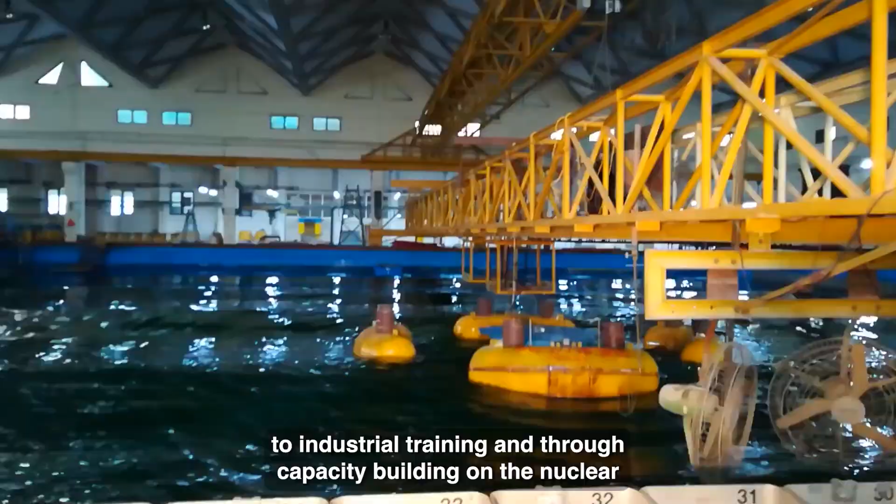This maritime engineering program is a very special multidisciplinary program with input from mechanical, civil, structural, aerospace, naval architecture, chemical, electrical, electronics, and applied mechanics. It is completely dedicated to industrial training and thorough capacity building in the new trade of the maritime sector. It's a growing economy offering many job opportunities and research frontiers as India grows, and the Blue Corridor initiative planned by the Government of India requires maritime engineering growth in the country. This program caters to that expected capacity building.

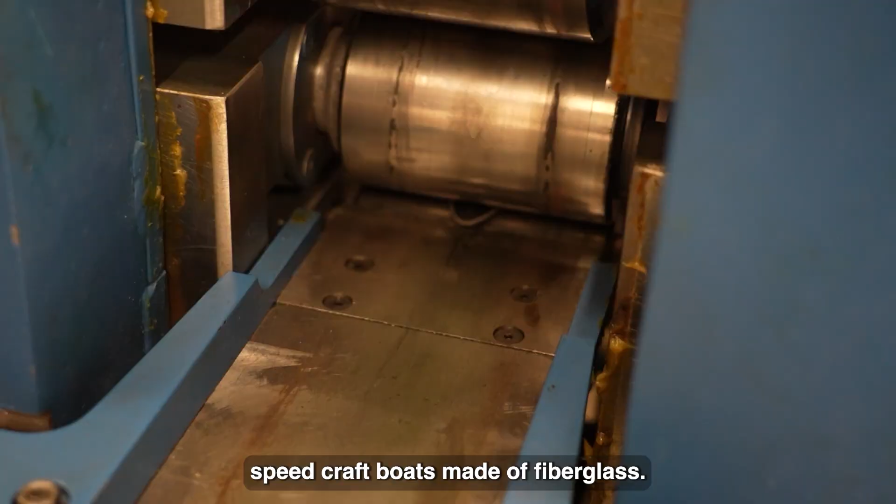This is part of the material science engineering laboratory, a teaching aid for the maritime engineering program. In materials innovation for the maritime industry, though concrete and steel remain conventional choices, we now see titanium vessels and high-speed craft boats made of fiberglass. These advanced materials don't always fit conventional standard design codes. We conduct box furnace tests, tube furnace tests, vacuum arc melting, induction melting, vacuum induction melting, and vacuum sealing, all present in this laboratory, which is just a small segment of the material science laboratory.

A typical furnace can test specimens at operating temperatures as high as 1200 degrees Celsius. At room temperature and ambient conditions, mechanical properties don't change much, but as you'll see in the course lectures, the strength of the material degrades when the temperature rises beyond 600 degrees. So for fire resistant design, you must choose an alloying element such that the strength doesn't degrade beyond 600 degrees Celsius.

Welcome to the ambience of the IIT Madras lecture theatre, one of the interesting classrooms where maritime engineering classes are conducted. We have state-of-the-art projection facilities and good audio-visual recording systems. Once the lecture is over, the system can generate PDF files directly and email them to your email ID. It's a state-of-the-art facility where lectures are recorded for a lifetime and shared with students immediately. This is the IIT Madras library.

The library has collections of standard textbooks and references for the course and program. It also has many online editions of design codes of practice, reference materials, and e-collections of video lectures from international courses and programs related to maritime engineering.

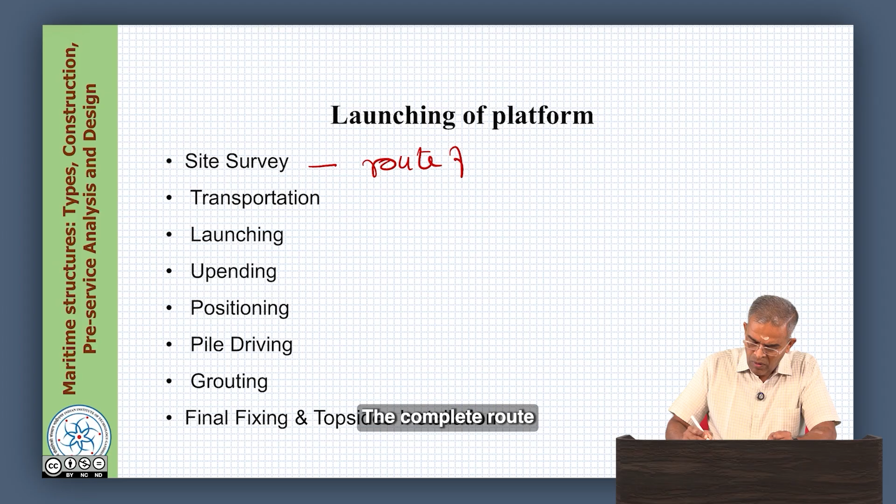Before we launch a maritime structure like an offshore platform, there are a few steps involved to check and assess the requirements for successful launching. One important step is the site survey, where we need to assess the complete route of transportation, the sea conditions, the weather window, and of course the soil conditions at the site.

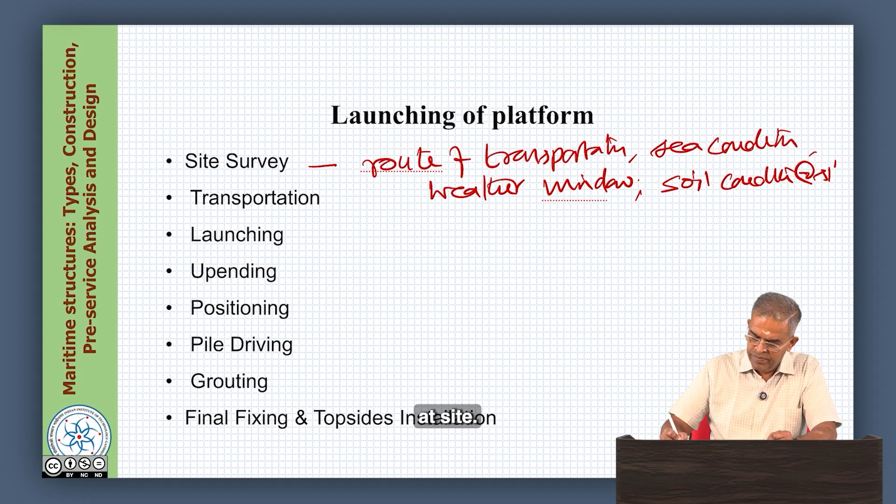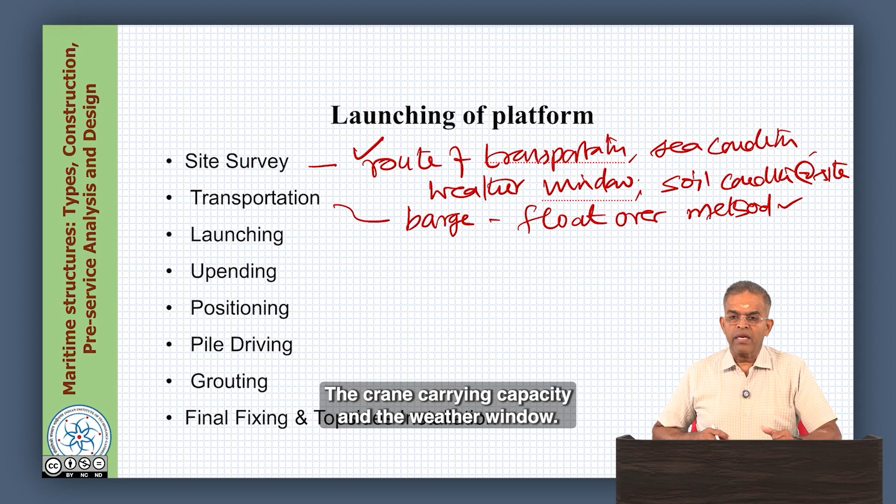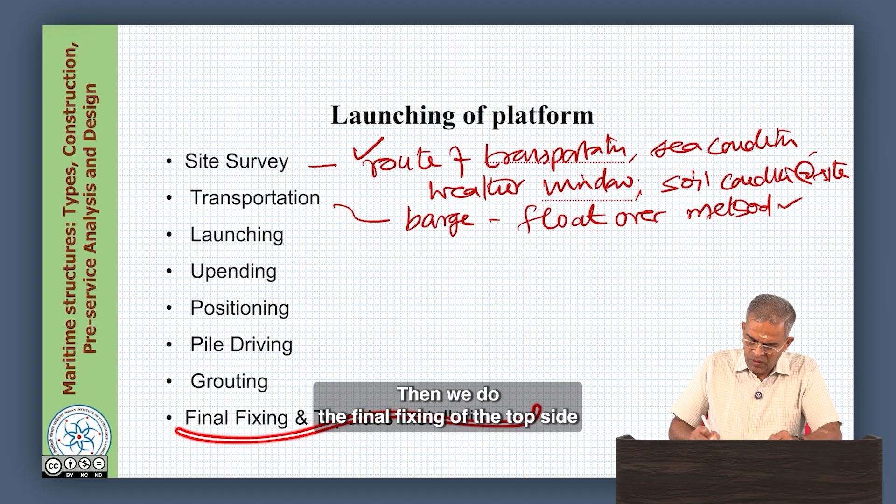We have to ensure that they are all suitably assessed in the design stage itself before we start the launching. Then we need to assess the possibilities of successful transportation, generally done using a barge, which is the float over method. We check the barge capacity, the crane carrying capacity and the weather window, and confirm that transportation through barge float over is possible. Then we start looking at the launching operation, then upending, positioning, pile driving, grouting are all followed after launching. Then we do the final fixing of the top side and make the complete platform ready.

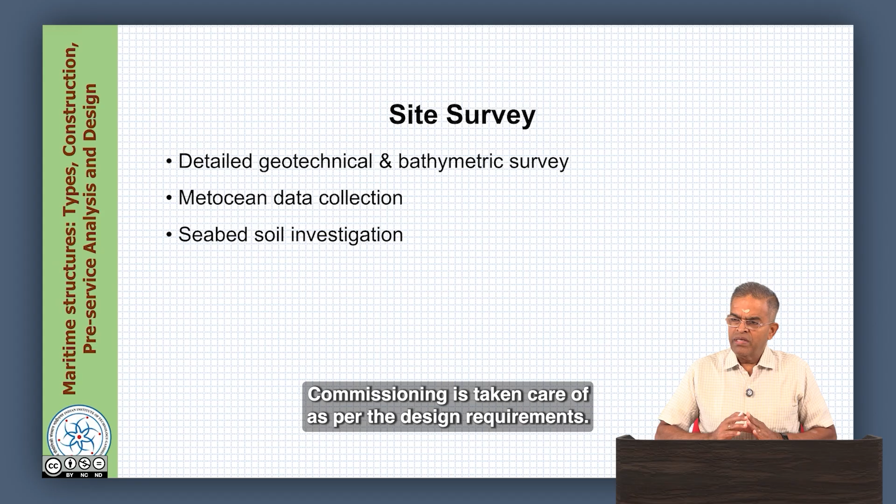Let us talk about some important points related to site surveying. The site surveying job includes detailed geotechnical investigation and a thorough bathymetric survey, which confirms the location chosen for the platform commissioning is taken care of as per design requirements. The geotechnical conditions prevailing at the site can accommodate the design of the piles, and en route of transportation also confirms enough water depth, and the weather or wave climate is suitable for transporting the object from the fabrication yard to the site. So a detailed geotechnical and bathymetric survey report should be ready upfront as part of the site survey.

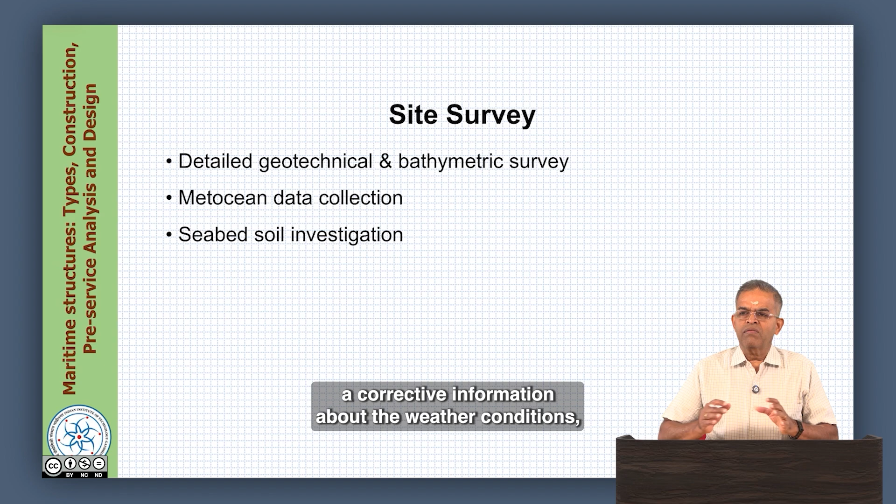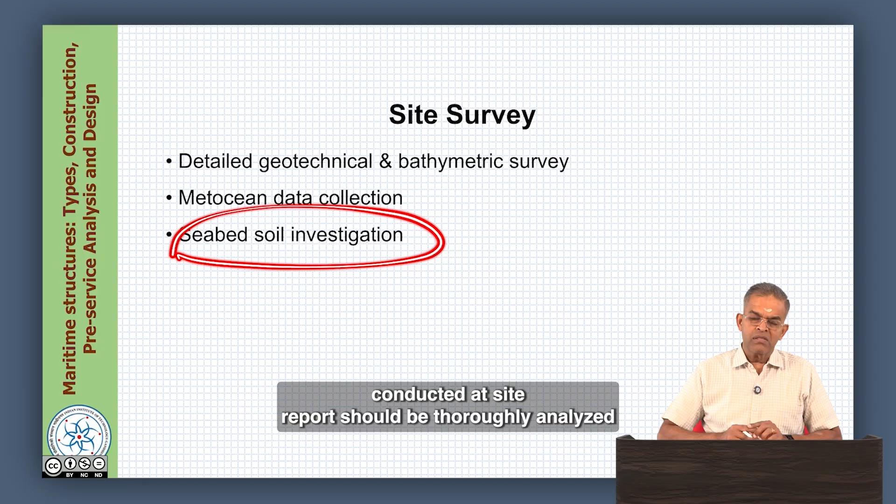Metocean data is also important because it gives cohesive information about the weather conditions, wind condition, current prevalence, wave and wind directions, humidity, temperature, rainfall and sea swelling, etc., during the specific window in which transportation is going to happen. The seabed soil investigation report conducted at site should be thoroughly analyzed so that pile driving can be done feasibly within the required time. Site survey becomes the most fundamental part of this whole process of fabrication, installation and commissioning, so we need to do this carefully and the reports need to be filed with updated information available at the site.

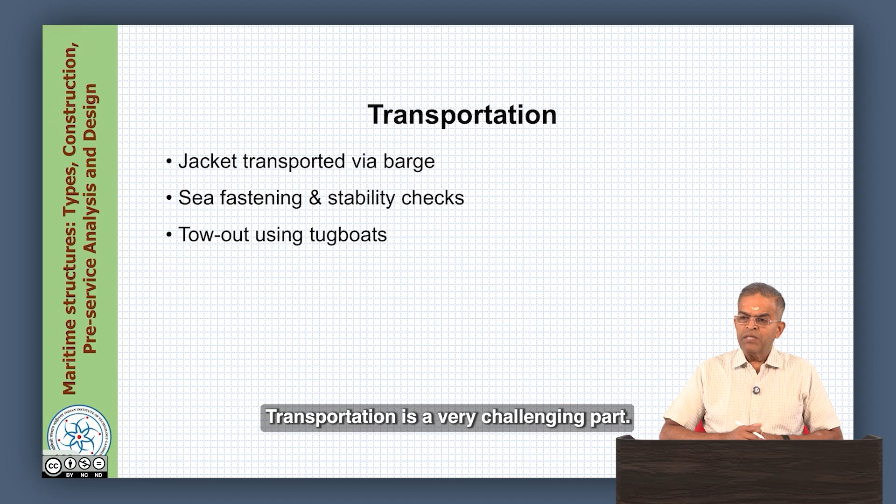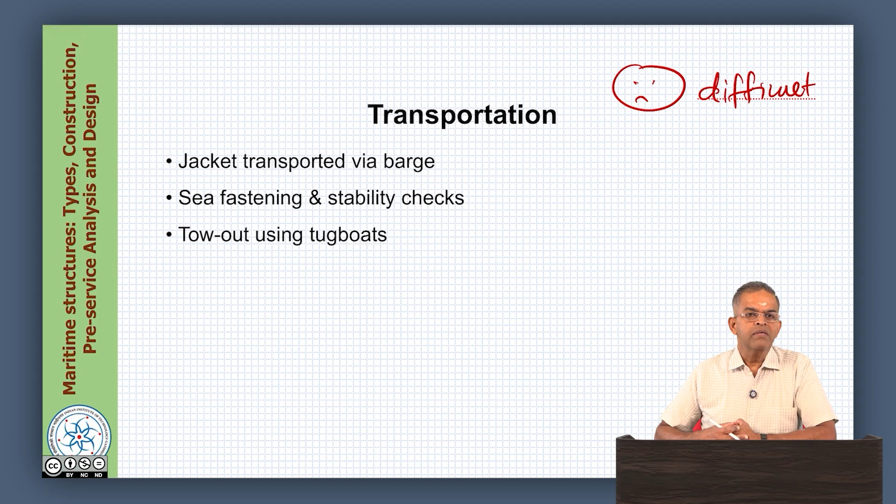Transportation is a very challenging part, I should say the most difficult part in the whole launching and commissioning process. Transportation looks like as if you just load the jacket on a barge and then append it. It is not that easy, because there are instances where the whole assembly of the unit has got completely derailed and we lost the unit during transportation. So one has got to be very careful.

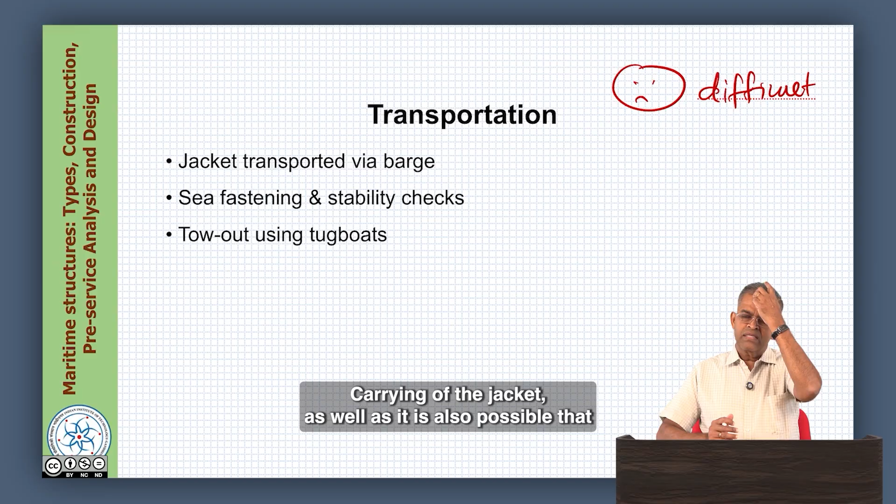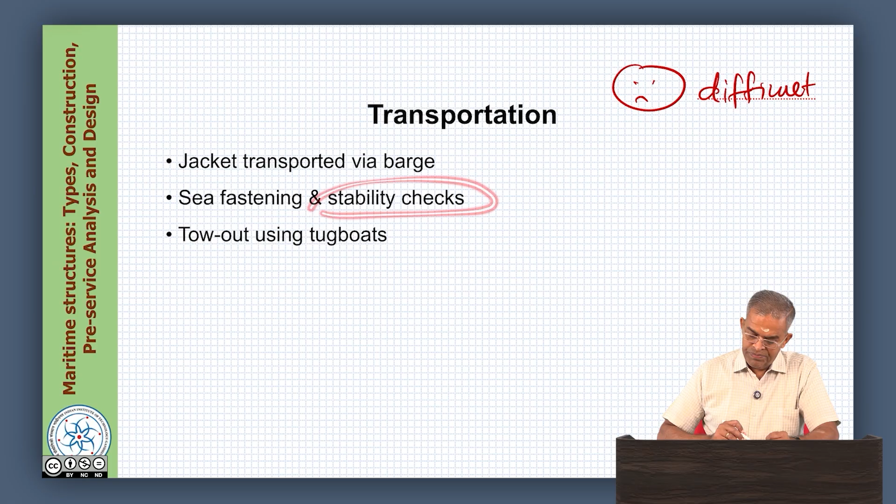If you are planning to transport the jacket via a barge, the capacity of the barge, the crane uplifting facilities, the conditions, inspection and quality control should all be followed thoroughly so that the barge is inspected for its capacity to carry the jacket, and is also in good condition to sail from the fabrication yard to the site of installation. All sea fasteners are to be in place, and one has to do a thorough stability check of the transportation. If using a tow out with tugboats, one should also check the location, number and capacity of the tugboats used to tow the barge from the fabrication yard to the site.

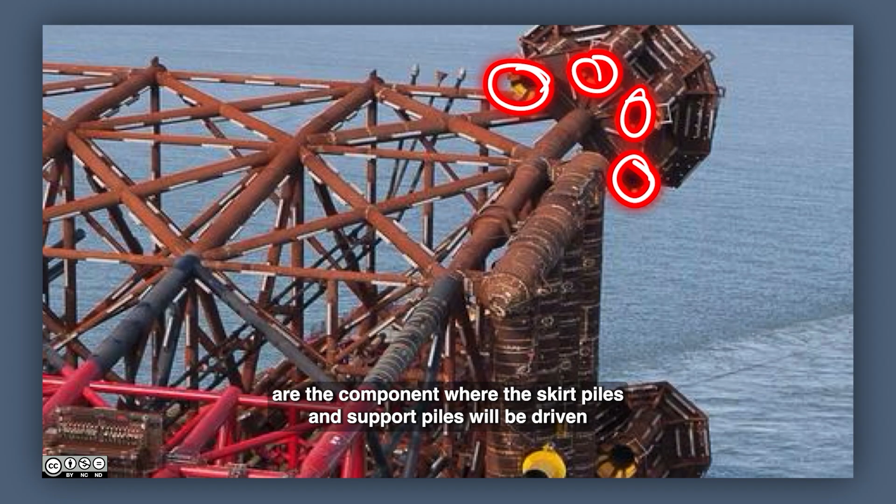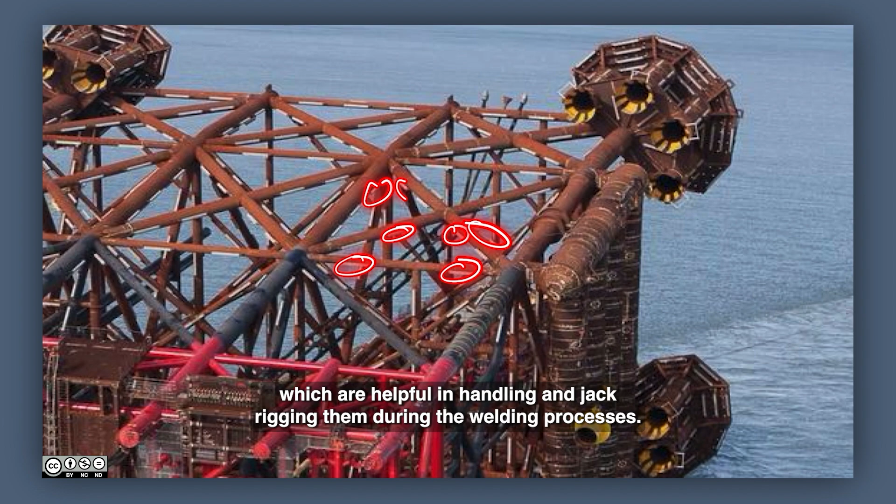One can also see the top mounted pockets which are sealed, which are actually fasteners that will hold the top unit on this. These holes are the components where the skirt piles and support piles will be driven, and one can see the main legs, the braces and the connections which are thoroughly inspected and welded, along with the facilitating parts which are fasteners helpful in handling and jack rigging them during the welding processes.

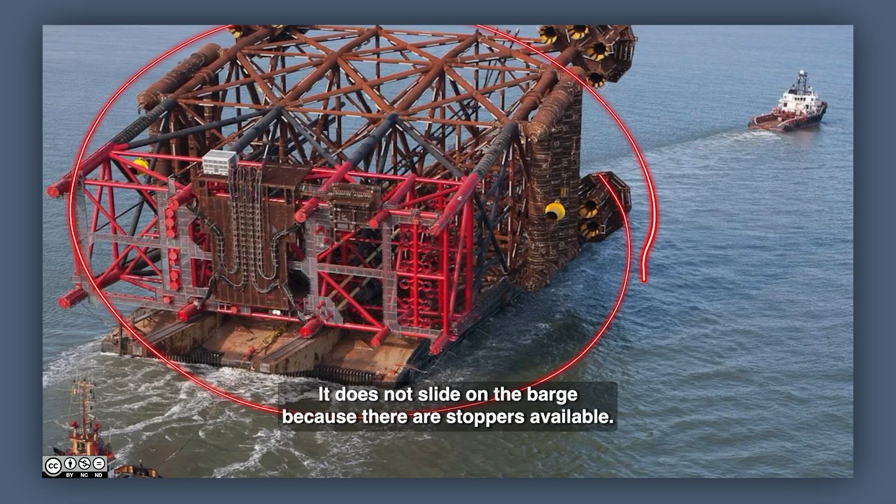One can also see the complicated amount of steel material involved in this, and the boat landing part and so on, which are attached as appurtenances to the jacket, and the whole jacket is kept on the barge. This is the barge, it is supported and rests on its own weight. There is no crane ancillary support given to this. It does not slide on the barge because there are stoppers available. You can see this portion is not horizontal, it is tapered, so the jacket cannot slide out while the barge is in motion.

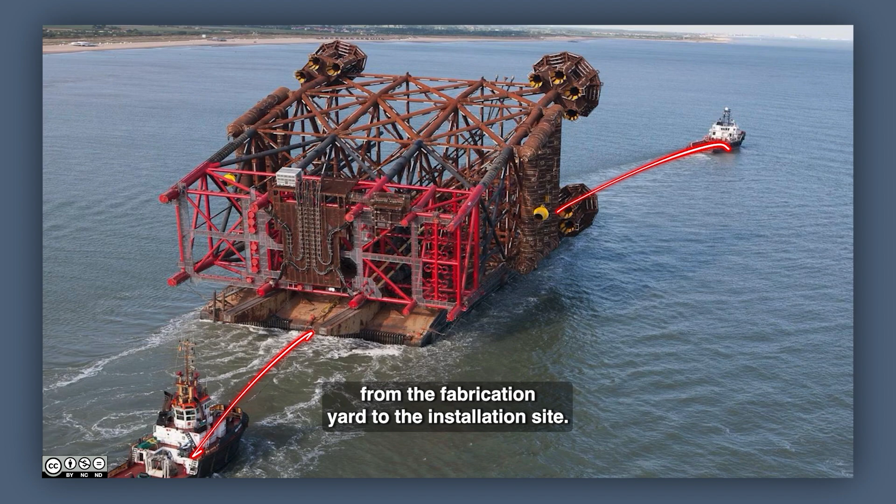Then these are the vessels, the tugboats, which try to drag and push the barge from the fabrication yard to the installation site. So this is a very typical load out operation that happens during the jacket transport of a maritime structure.

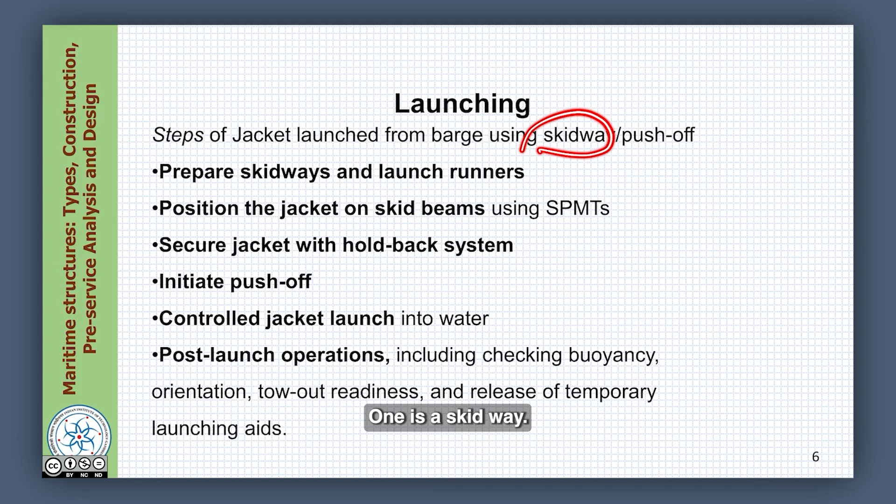During launching, what are the steps involved? Let us see them in detail. There are two ways to do this: one is the skid way, the other operation is push off. Skid way is sliding using a rail, push off is using an external jack to push the unit. Let us say I have a fabrication yard.

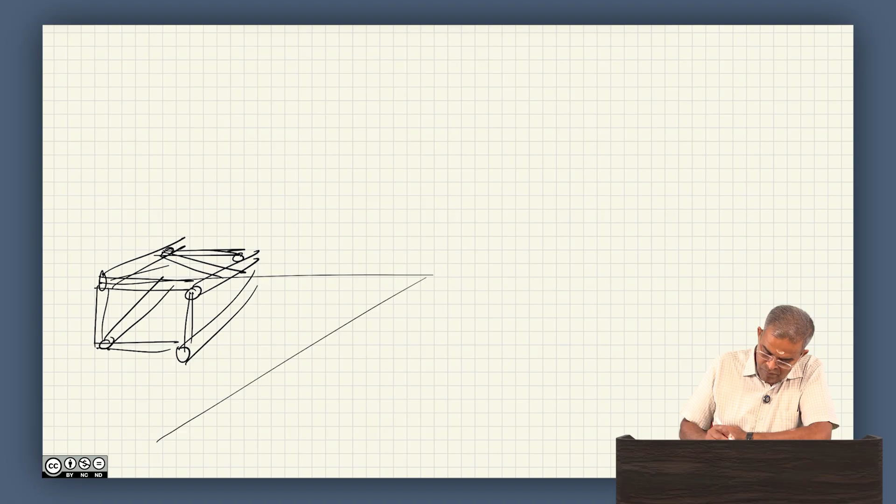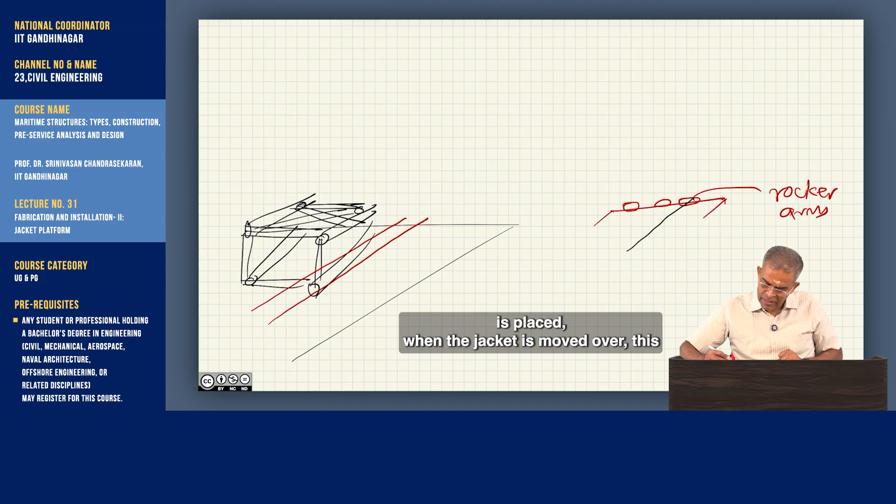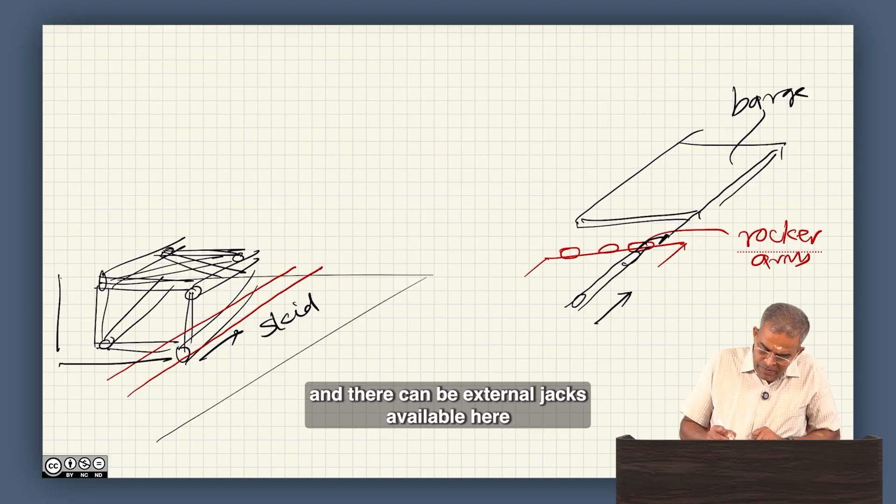So it's a fabrication yard, the jacket is placed here, and now I have rails on which this jacket can be slided. At this end there will be rocker arms, which, when the jacket is moved over this, will help to twist it and load it onto a barge. This is a barge. These are skidways, and there can be external jacks available here to push this into the barge.

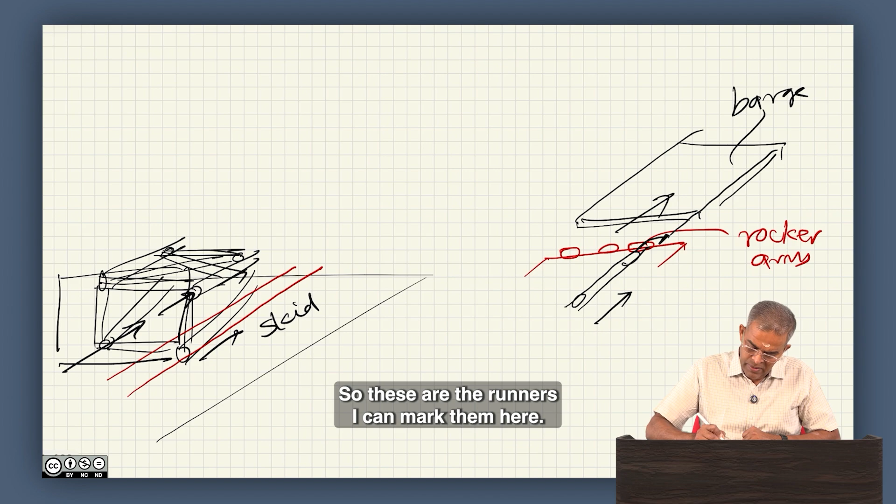So skidways and push off are the types of operations done to launch the jacket from the fabrication yard onto the barge. One has to prepare the skidways and launch the runners. These are the runners, on which the jacket will slide. So one has got to launch these runners, position the jacket on the skid beams.

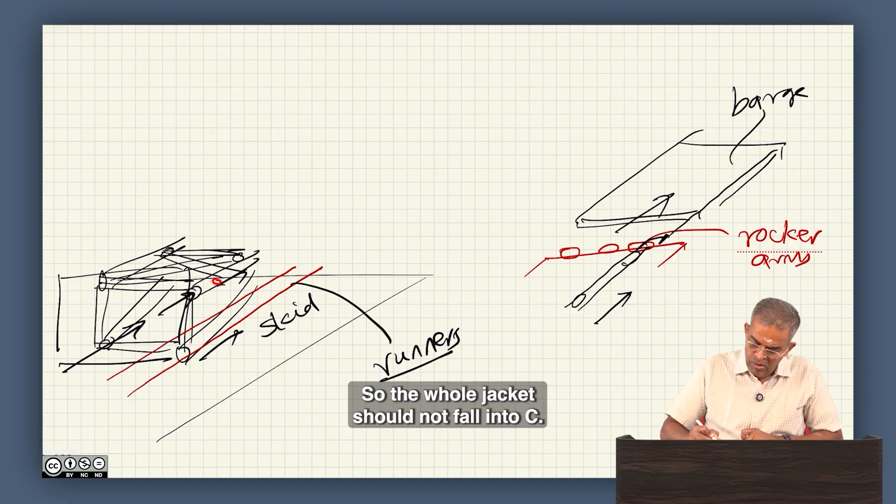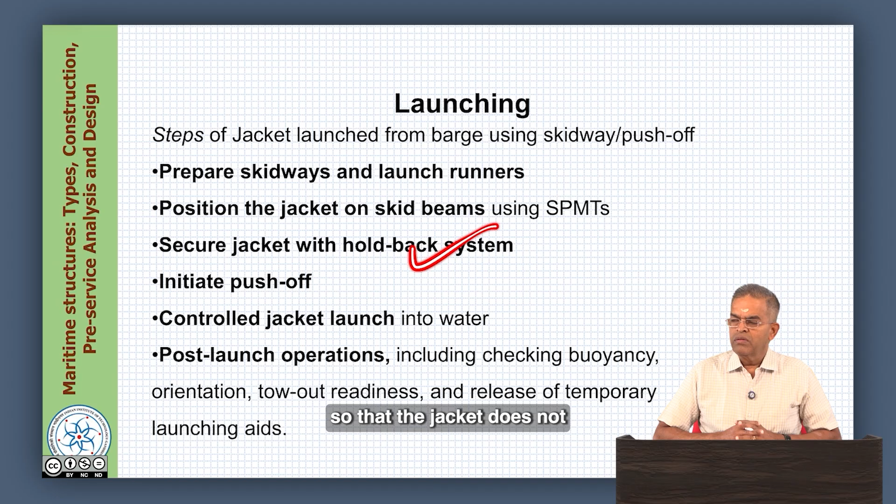Then secure the jacket with a holdback system, so the whole jacket does not fall into the sea. There is always an arrangement to hold back the jacket with the cranes as a support system. Make a holdback arrangement, it's a support system, so that the jacket does not dive into the sea and you lose the object.

Then slowly and gradually initiate the push off. As the jacket moves from the fabrication yard on the skid beam and the rail towards the barge, the weight is shifted gradually to its top side, and then it will start diving onto the barge.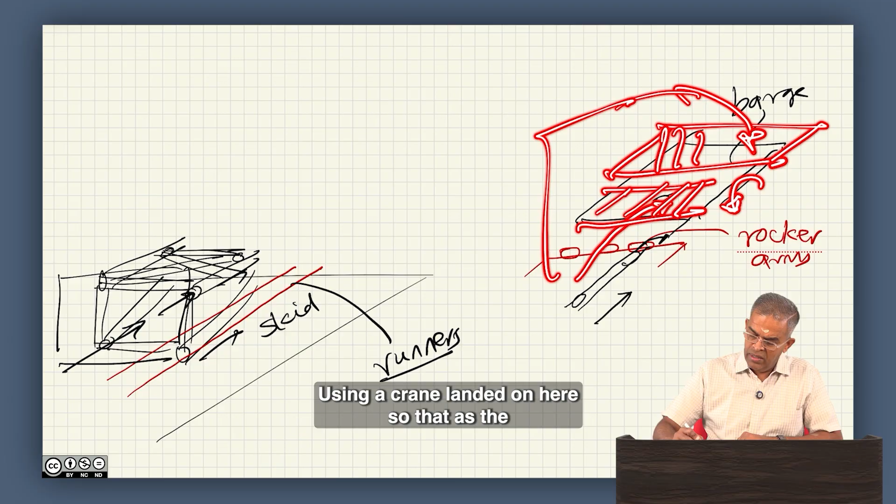While diving onto this, you need to control the jacket launch, because once the jacket is launched on the barge, due to the weight at this area, the barge will experience a moment. So one has got to have a counter effect on this, which will be gradually released using a crane landed here, so that as the jacket dives onto the barge and is pushed gradually onto it, the whole weight is balanced on the barge. There will be a support system holding the jacket and gradually it is pushed off. The jacket is not simply pushed into the sea and then barged. There is a controlled movement of the jacket launch when it goes into water.

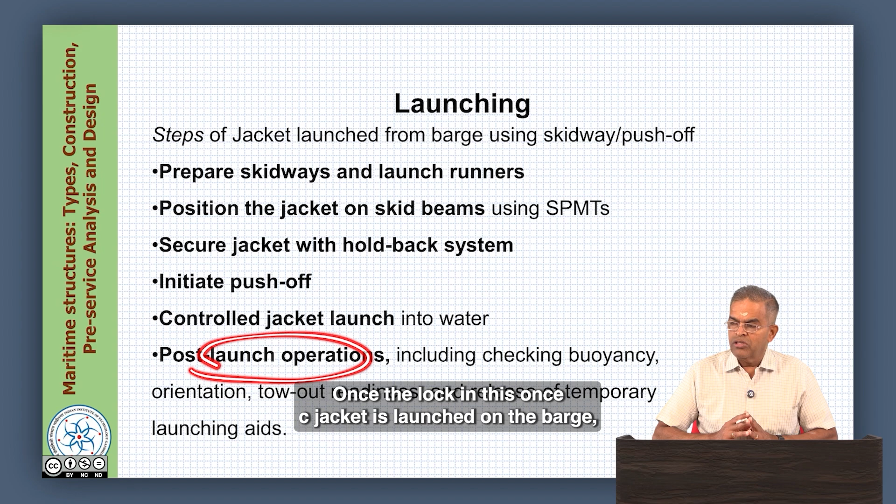The post launch operation includes checking the buoyancy, checking the orientation, tow out readiness, and release of temporary launch aids. These are the steps and precautions required during the post launch operation. Once the jacket is launched on the barge, we need to check its buoyancy and then the orientation, that it should be properly launched. Because the jacket is of a rectangular size, you can also launch it this way.

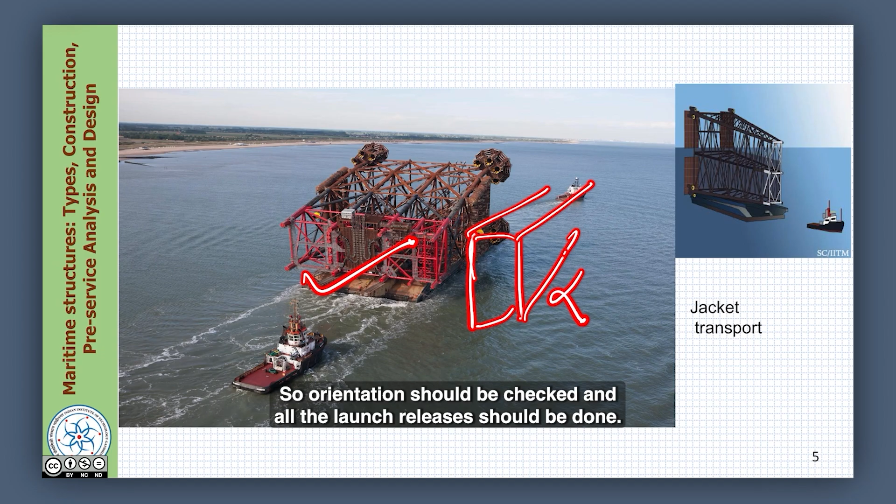So that is the wrong orientation. Orientation should be checked and all temporary launch releases should be taken care of, so that the launch is done successfully, and the post launch checks the buoyancy, so that the barge is able to carry the design load.

Once this is done, let us see quick figures. Once the jacket is placed on the barge, it reaches the site of installation. The skid beam is kept horizontal initially, then this is a skidway and the barge runner contains all the skidway.

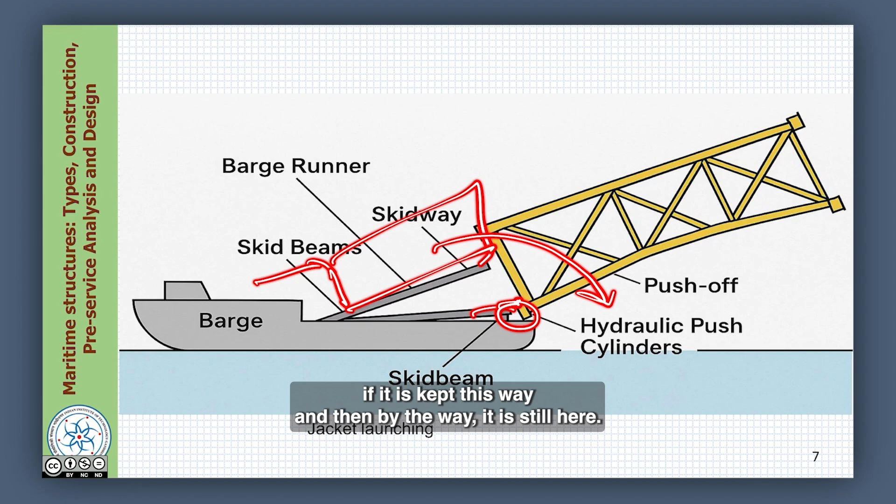Gradually, the skid beam is released. This is the jacket. Let us say the skid beam is released. So when released and it is pushed off, it dives. At this point, if it is kept this way and then dive, the weight is still here. If you keep it horizontal and make it dive, the weight will move towards here. That is very important.

So you raise the skid beam, the jacket is here, the weight is here because you have raised it. Gradually roll this end and push off the jacket.

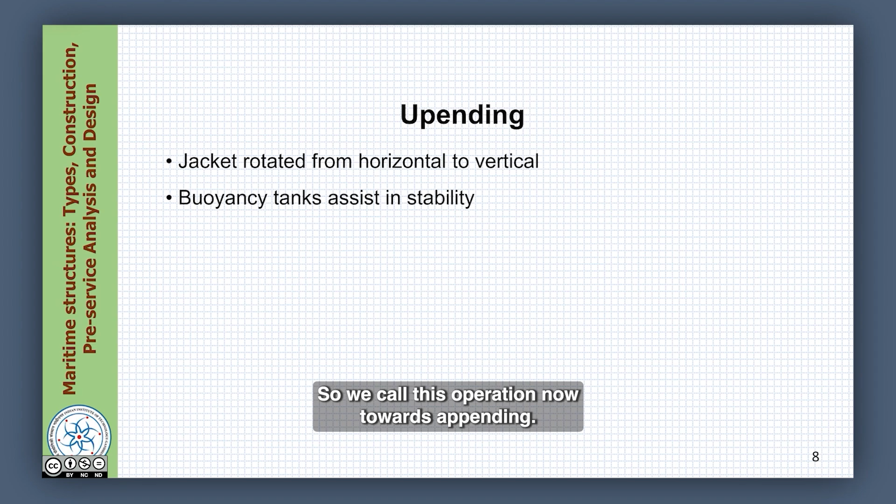We call this operation upending. Upending is an operation where the jacket is rotated from horizontal to vertical, because when you launch it, it is more or less horizontal. You need to make it vertical because the jacket has to stand upright. This operation of shifting from the horizontal position gradually towards vertical position is called upending. The jacket is rotated at the rocker end to do upending carefully.

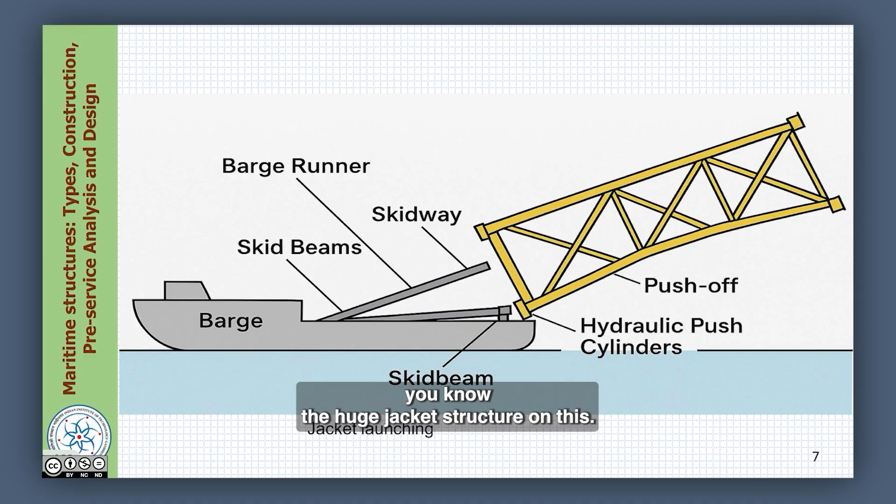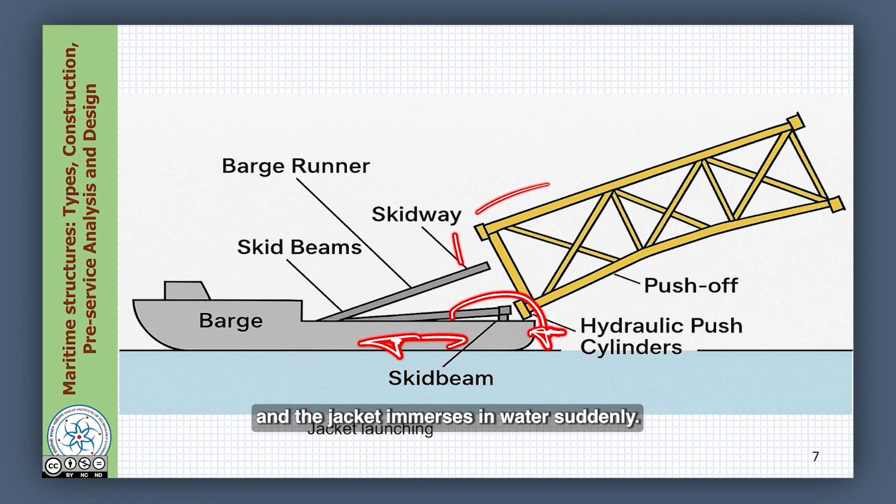Obviously, when you have a huge jacket structure on the barge and it is upended, the barge will be pushed to this side because of its weight. So one has to be very careful about holding the barge in position and holding the jacket in position, so that the upending operation does not create an undesirable push out of the barge, causing it to slip off and the jacket to immerse in water suddenly. It should be gradual.

The buoyancy tanks in the barge are used to maintain stability of the barge during this operation. So upending is again a very challenging job.

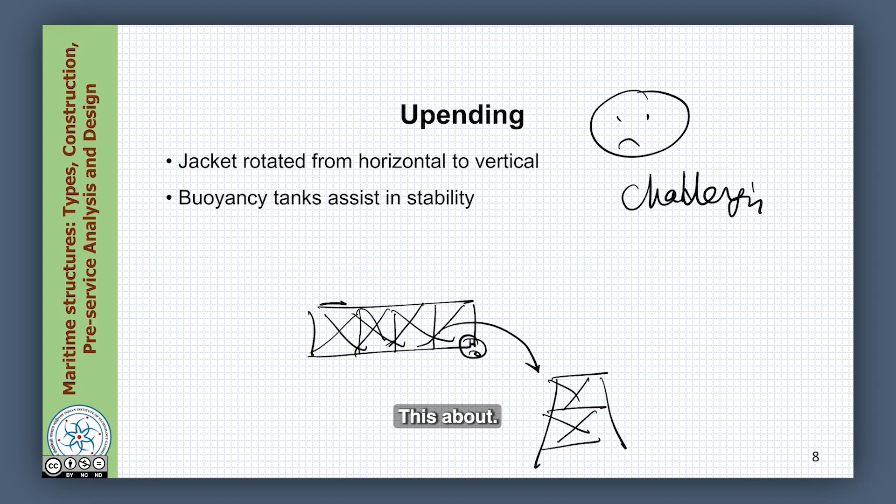Upending is when the jacket, which is horizontal, is gradually rotated at this pin point and the jacket becomes vertical. This is a barge. So this operation is called upending.

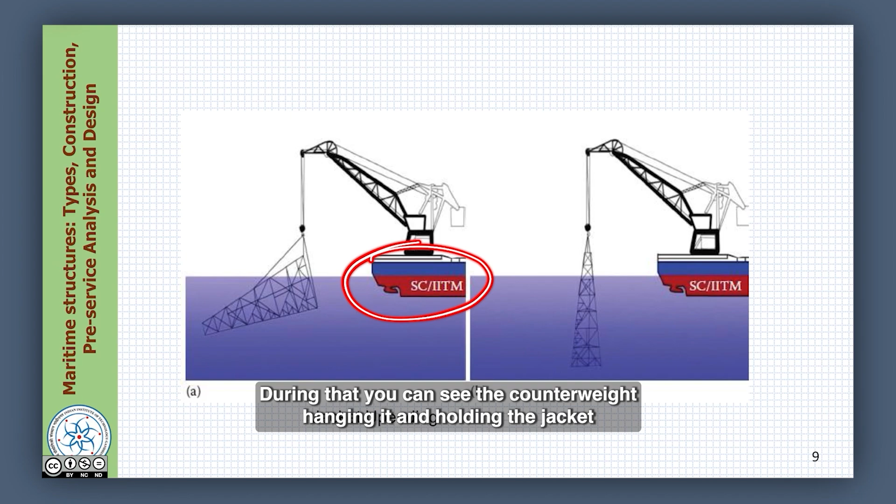One can see the figure of how upending is done. So gradually it is launched and the crane is supporting it. Then the barge is balanced with additional buoyancy tanks. During that, you can see the counterweight hanging and holding the jacket. Slowly it is released and the top end is pushed up, so the jacket becomes vertical from the horizontal launch position.

Once it is upended, I have to do positioning, where the jacket has to sit on a specific location where the piles are to be driven on the seabed. What are the steps involved in positioning? First, stabilize the upended jacket. How do you do that? Use buoyancy tanks to upend the frames.

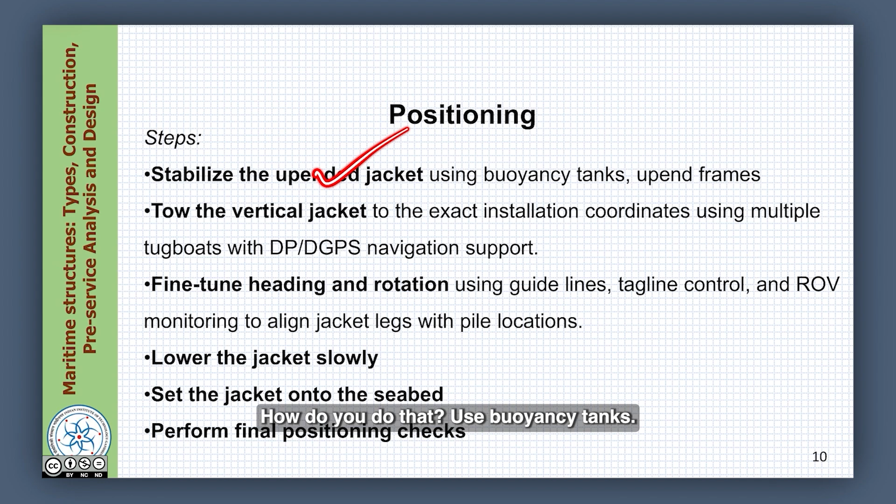Then gently tow the vertical jacket. Now the jacket is vertical. Tow it to the exact location coordinates using multiple tugboats. You can gradually do that because the jacket is now floating. You hold it on top and using tugboats gradually tow it to the site where the exact installation has to happen.

So you match the coordinates of the navigation system from the launch barge with that of the GPS system, so that you know exactly where the coordinates are on the seabed and where the coordinates of the legs are. You match them correctly and gently tow them. Then you do fine tuning of heading and rotation of the jacket to maintain orientation, and then tagline control.

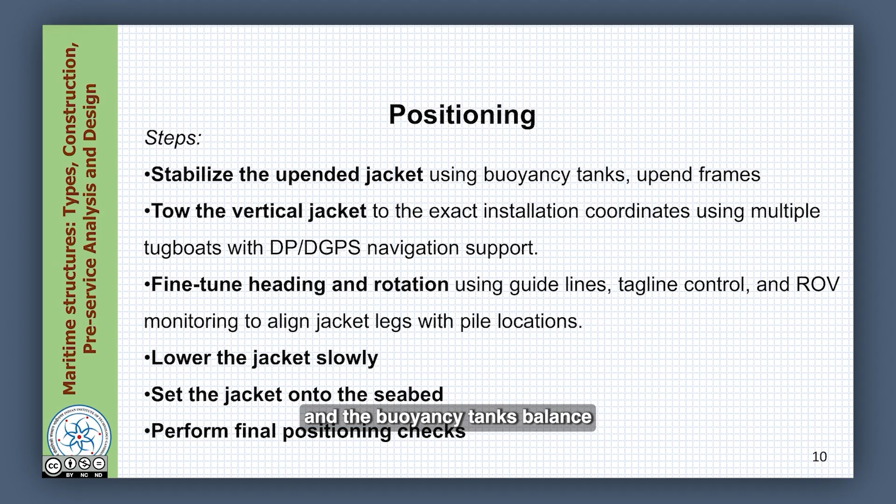Sometimes ROVs are also used to guide the alignment of the jacket with the pile locations. Once the coordinates are established, lower the jacket slowly. Now the jacket is vertical, held with a crane supported on a barge, and the buoyancy tanks balance the required upward forces. The coordinates are matched with the GPS, then you gently lower the jacket and let it rest on the seabed.

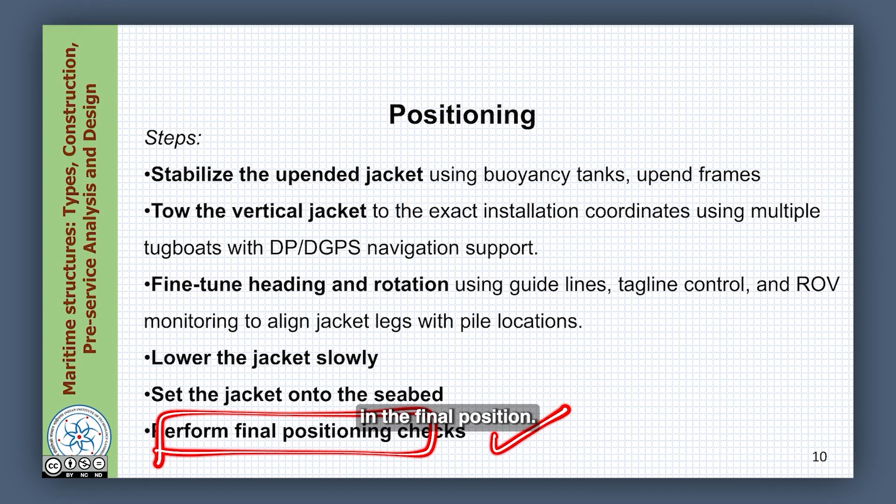Finally, position the jacket, perform the checks, coordinate matches, then place the jacket in the final position. Positioning is also equally a difficult job, but it is more or less assisted using ROVs and GPS coordinate matches, and relatively positioning is simple. Relatively, it is simple. Launching and upending is the most challenging part. Once it is done successfully, vertical towing and positioning is relatively easy.

Once the jacket is now in position, we do mud matting. Mud matting is actually a template where the jacket exactly will rest. It is very difficult to orient each leg of the jacket, so we do a complete mud mat. The mud mat is placed on the seabed and the jacket fits on the mud mat. Lower the jacket slowly until the mud mat at the base of each leg makes the first contact with the seabed.

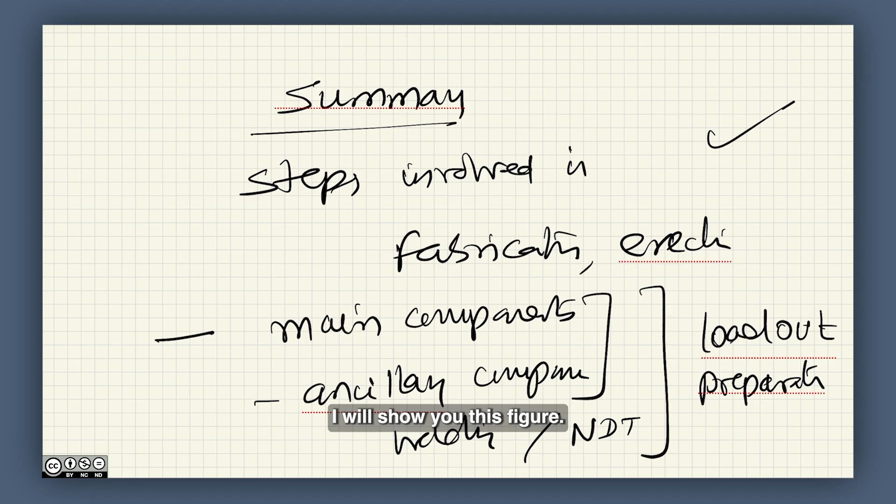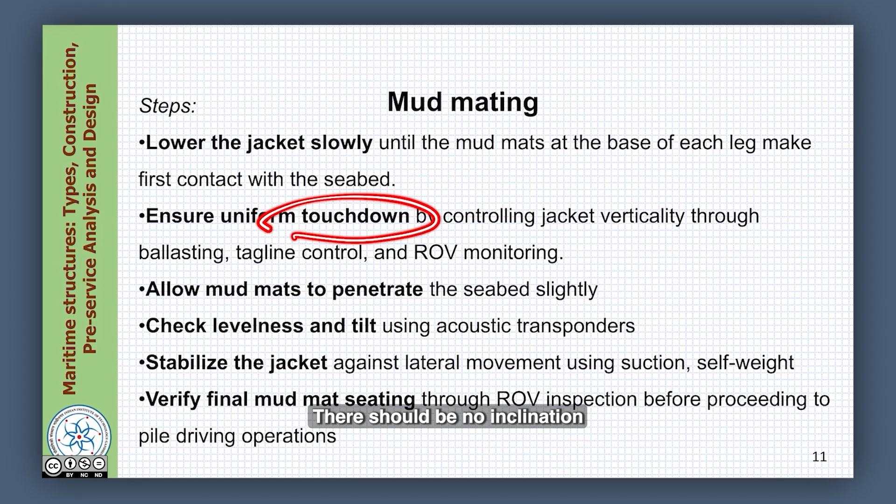The mud mat is made to rest on the seabed, and one has to ensure that all the points equally touch the seabed and the touchdown is uniform. There should be no inclination during this operation, so it should have a uniform touchdown, ensuring the jacket is vertical. This can be achieved through ballasting, tagline control and ROV monitoring.

Mud matting is done on site. It is a difficult task - the most challenging task where the efficiency of the jacket installation is challenged at the most important point: mud matting.

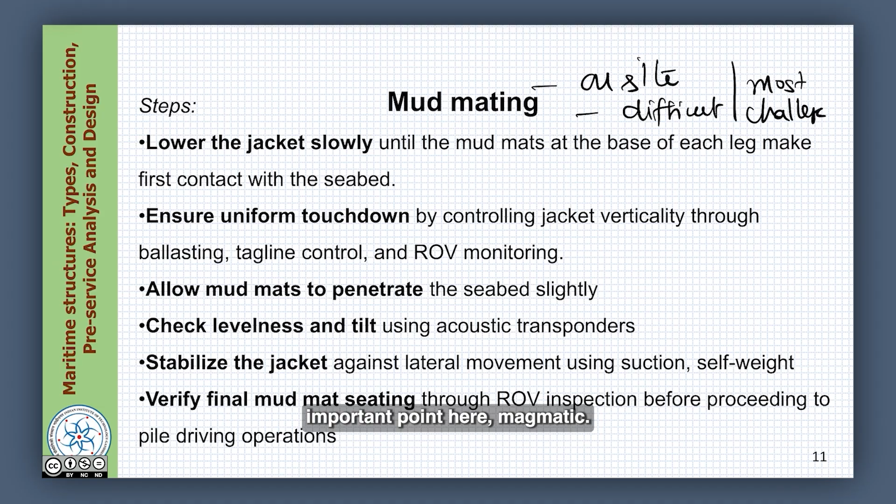Let the mud mats penetrate the seabed slightly. Check the levelness and tilt. We use acoustic transponders to do this, as they give you the angle of rotation, so you set the angle of rotation correctly to 90 degrees so that they are vertical. Stabilize the jacket against lateral movement - you can do this using suction, and of course the self-weight of the jacket, approximately 80,000 tons, is also huge mass. Then verify the final mud mat seating through ROV inspection before proceeding to pile driving operations.

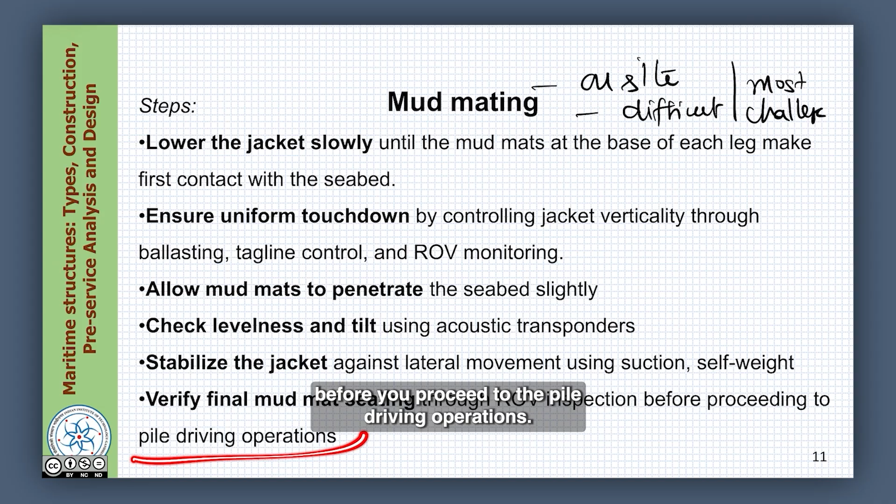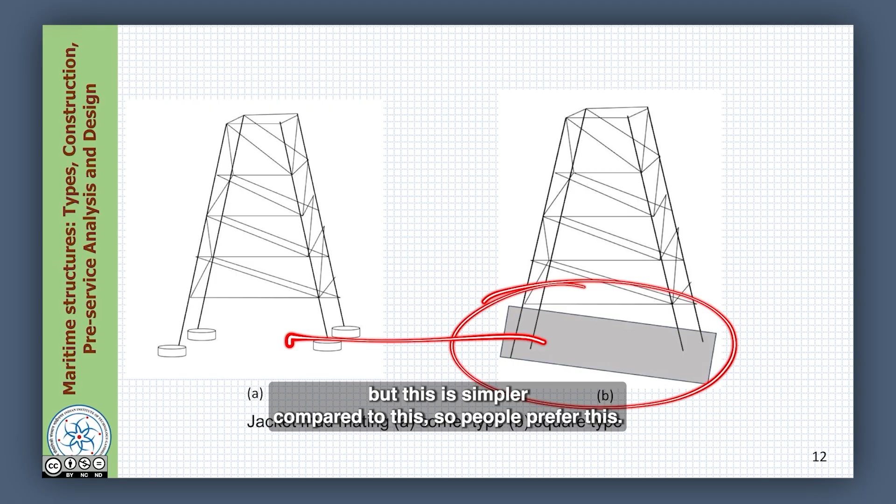Once the mud mat is done and the jacket is held vertical, pile driving is done. You can see the figure here how mud matting has been achieved - you can have corner type mud matting or square type mud matting. Corner type is for every leg independently, square type is for the whole base. Though it's expensive, it's simpler, so people prefer this. Then once the mud matting is achieved, one can do pile driving.

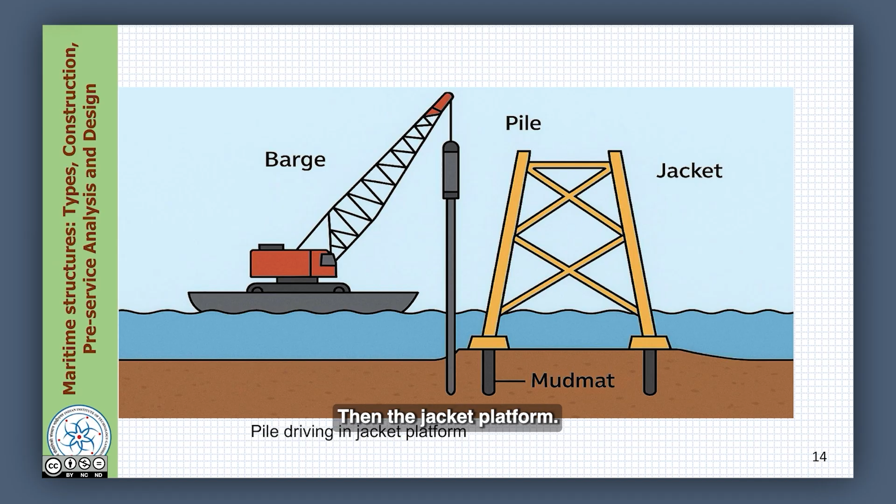The steel piles are driven through the legs to ensure foundation stability. I will show you a figure where the pile driving is done in the jacket platform - there is a barge holding as the pile is driven through the jacket. Then once the pile is fixed, the annular spacing between the pile and the jacket has got to be filled. That is called grouting - the annular space is filled, it is called grouting.

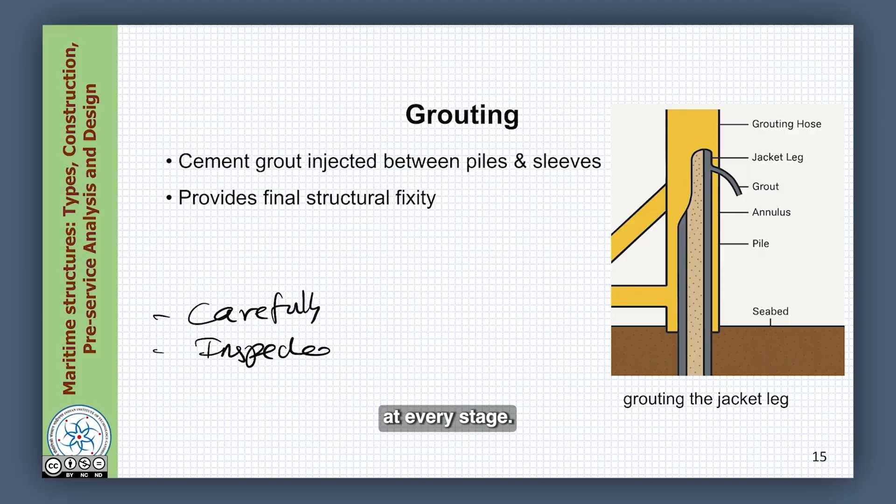It is to be done carefully and inspected at every stage, because this ensures perfect fixity of the leg to the pile. So this is a very important step to ensure the completeness of the successful launching.

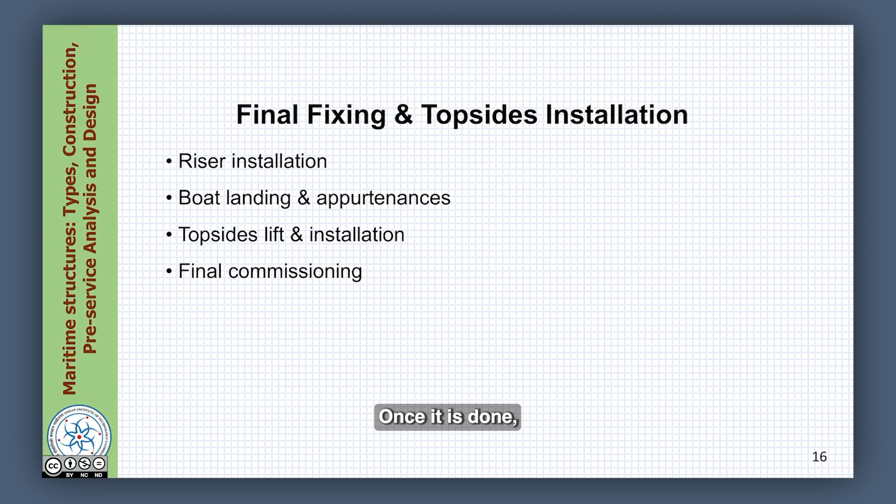Once it is done, the final fixing and topside installation has to happen. Then one can do the boat landing and appurtenance fixing. One can lift the topside, bring it and locate it here. Risers can be connected and one can do the final commissioning.

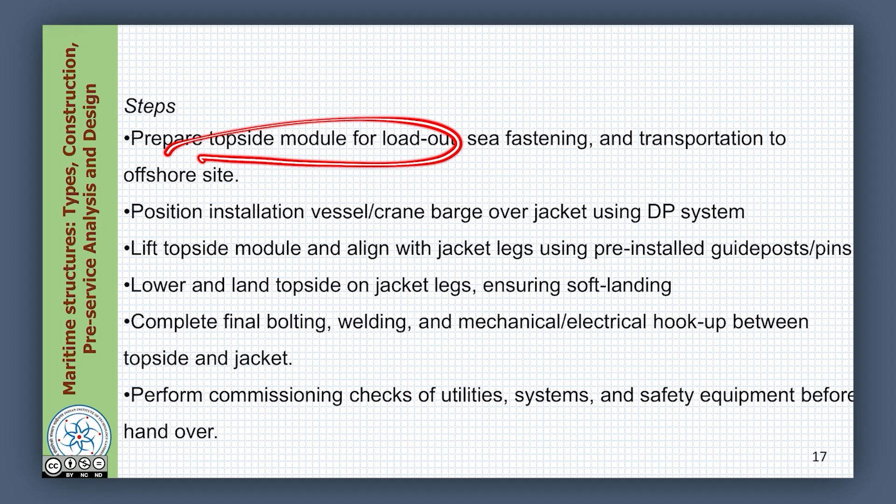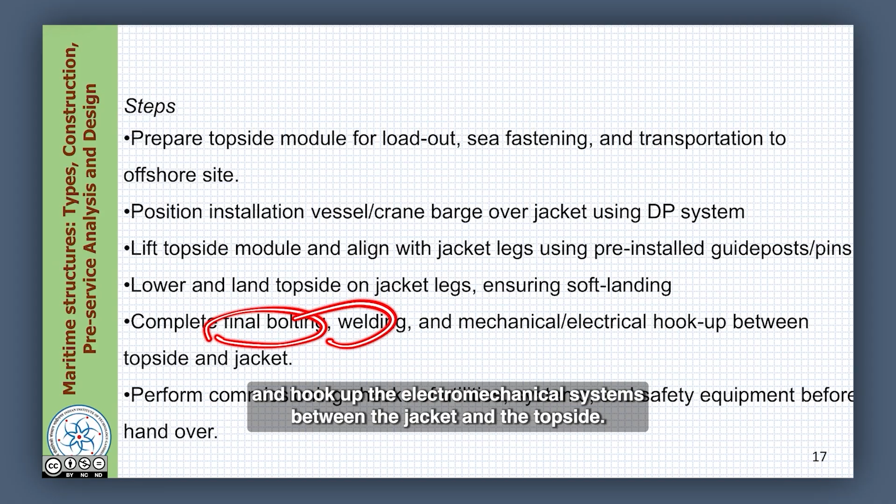The steps involved are as follows: prepare the topside module for loadout, use sea fasteners and transport the topside offshore. Position the installation vessel, crane barge etc. using dynamic positioning system. Lift the topside, align with the jacket legs and fit it onto the jacket top. Lower the topside and land it on the jacket legs, ensuring the landing is soft. Complete the final bolting and welding, and hook up the electromechanical systems between the jacket and the topside. Perform commissioning of the utility systems and safety equipment before handing over the site for inspection.

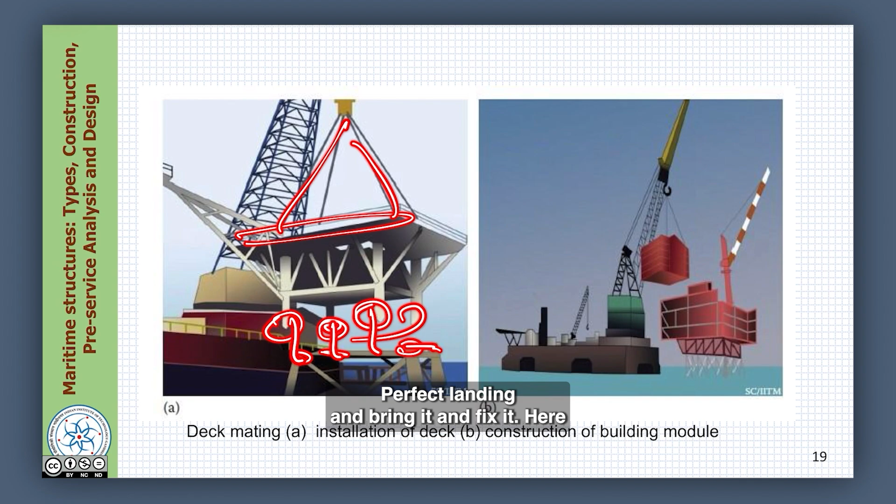So, this is how the top side installation on the jacket happens. You bring the top side, hold it and align it with the jacket legs, insert them for a perfect landing, and fix it here on the legs. We call this operation deck mating.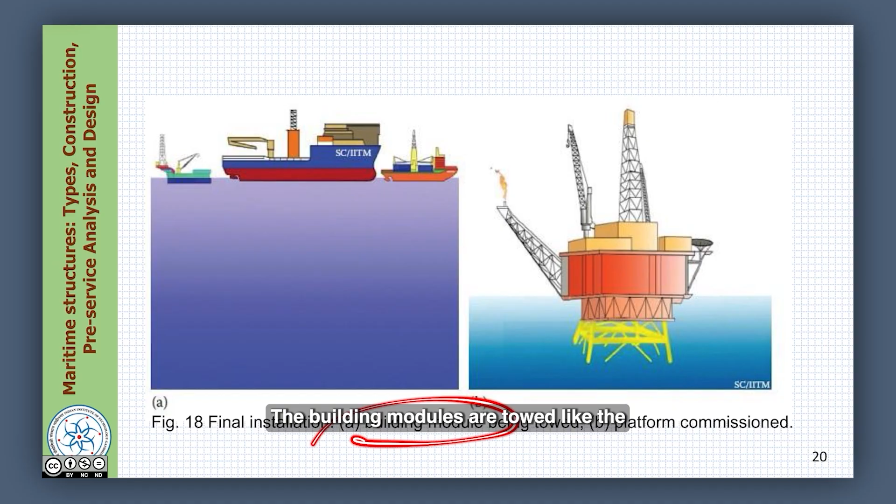Once the deck mating is done, the full platform is ready, and you start fixing the operational building modules. These modules include the derrick, the crane system, living quarters, electromechanical equipment, and helipad, all fixed on the top side at their respective locations. Then the platform is ready for operation.

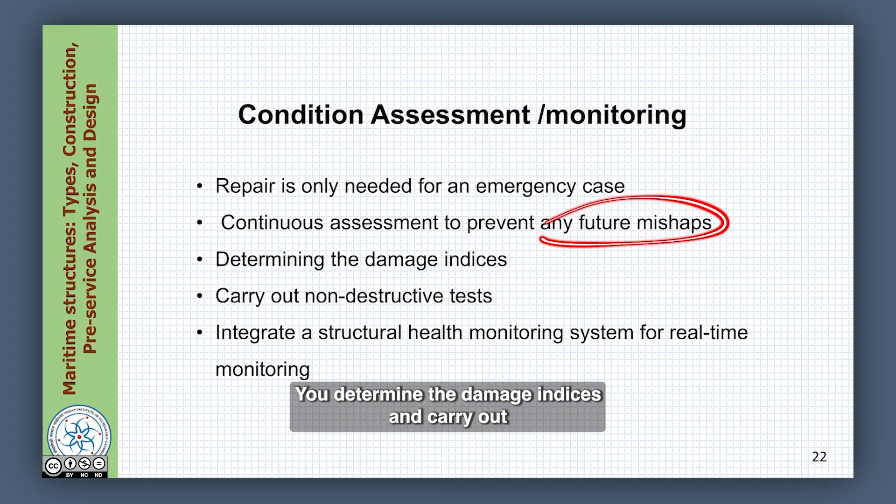Then you assess the platform using four procedures: condition assessment, maintenance, control and safe operation. Condition assessment is done only when repair is required in an emergency case. Of course, you also do continuous assessment of the jacket to prevent future mishaps. You determine the damage indices, carry out non-destructive tests, and check the integrity of the platform using a structural health monitoring scheme for real-time monitoring.

Condition assessment can be done by different methods. One can do visual inspection, liquid penetration test, magnetic particle inspections, eddy current testing, ultrasonic inspection, and wireless sensor networking, which is an AI influenced system.

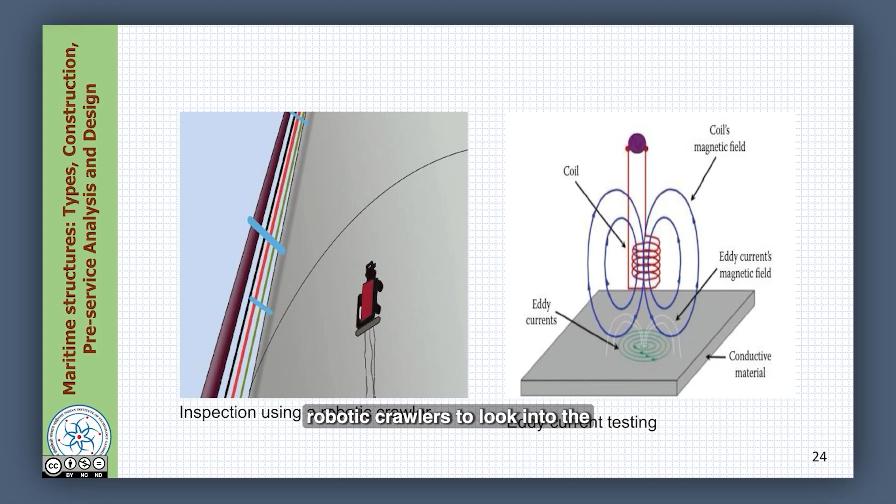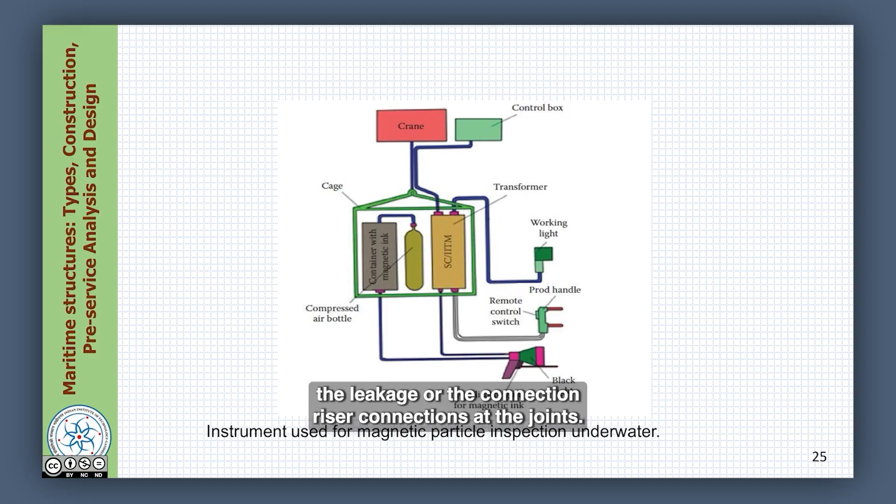People also sometimes use robotic crawlers to look into the surface testing of connections and vessels. These are generally done on boilers and electromechanical equipment on the top side. Eddy current testing is done for connections or fixtures to check for leakage. Magnetic particle inspection is done underwater to check leakage or riser connections for the joints.

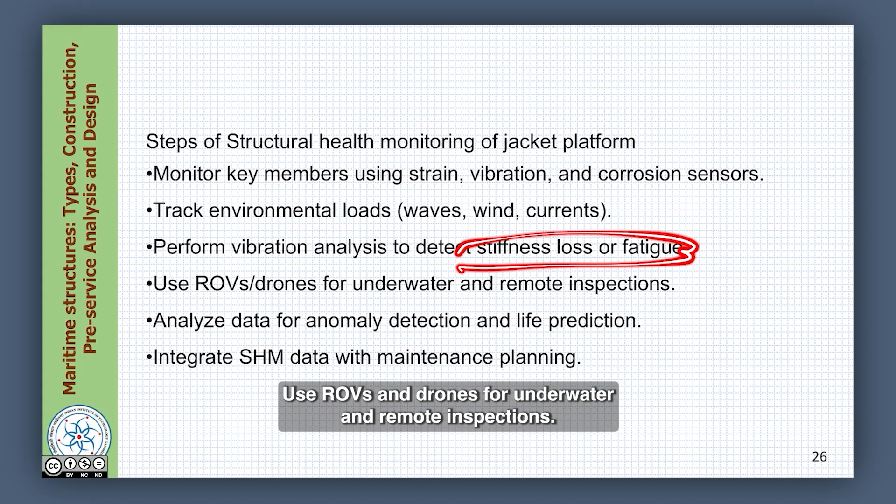There are different steps involved in structural health monitoring of a jacket platform. You monitor key members using strain, vibration and corrosion sensors, track environmental loads using wave and wind sensors, and perform vibration analysis to detect stiffness loss or fatigue. Use ROVs and drones for underwater and remote inspections, analyze the data for anomaly detection and life prediction, and integrate this data for maintenance planning using AI tools.

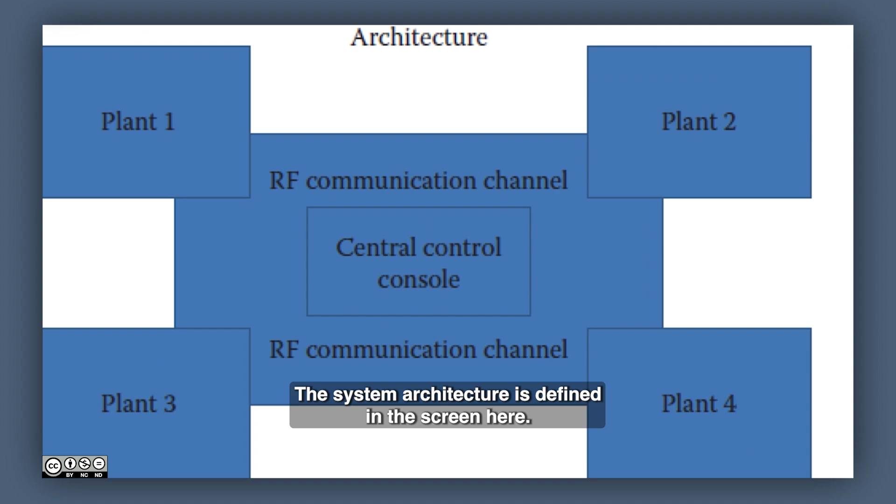Of course, this lecture does not cover the full scope of SHM health monitoring of these platforms. The system architecture is defined on screen here. This is the central control console. If you have 4 units to be monitored in parallel, the system architecture enables connecting them using an RF communication channel.

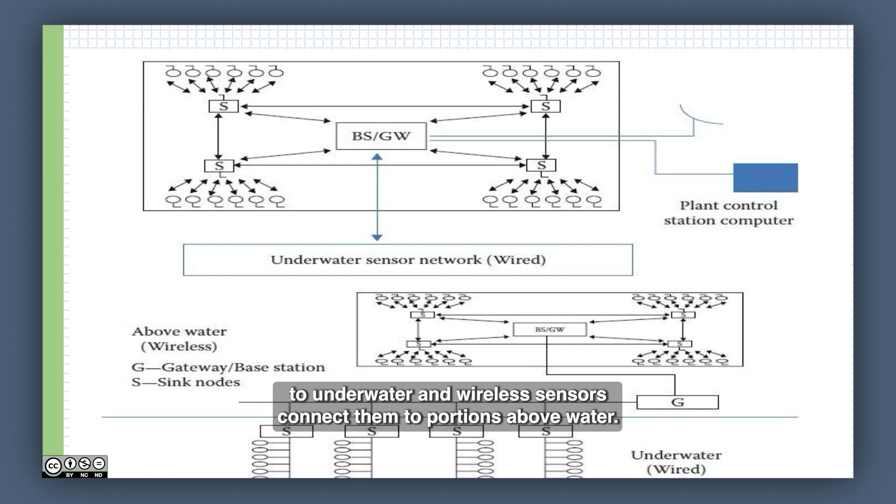Once connected, the wired sensors can connect to underwater sensors, and wireless sensors connect to portions above water, giving us a sensor network architecture. All this sensor networking is then connected to a central console where the plant is controlled by a computer stationed on the top side itself.

So, there are some gateway sensors used above water and below water. Above water they are connected using wireless, and below water they are connected using wired sensors. Once the sensor networking is completed, one can do condition monitoring on a periodic basis.

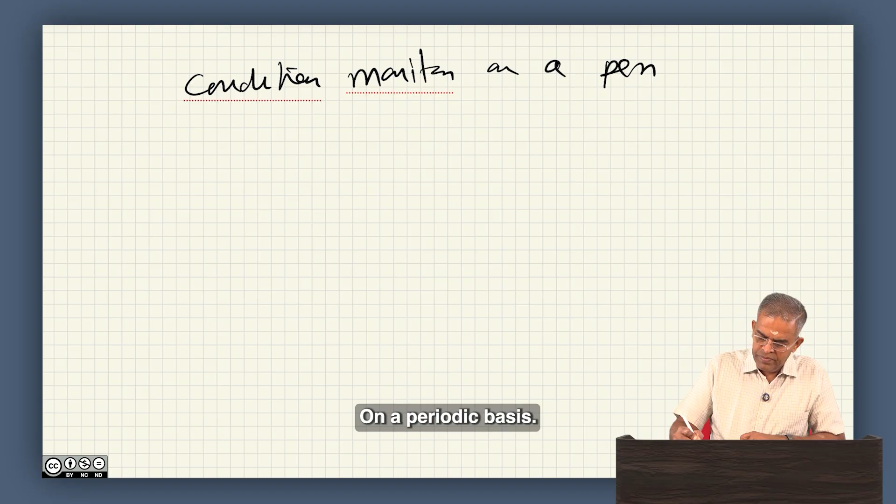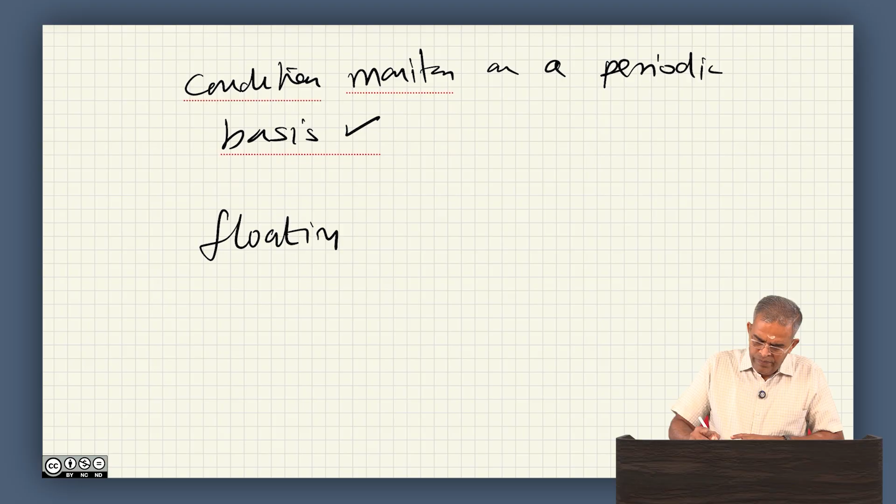So friends, we have seen one example where a fixed offshore jacket platform is installed, fabricated, towed, launched, upended, commissioned and ready for use. I will show you a quick animated video which helps you understand how a floating platform is also installed.

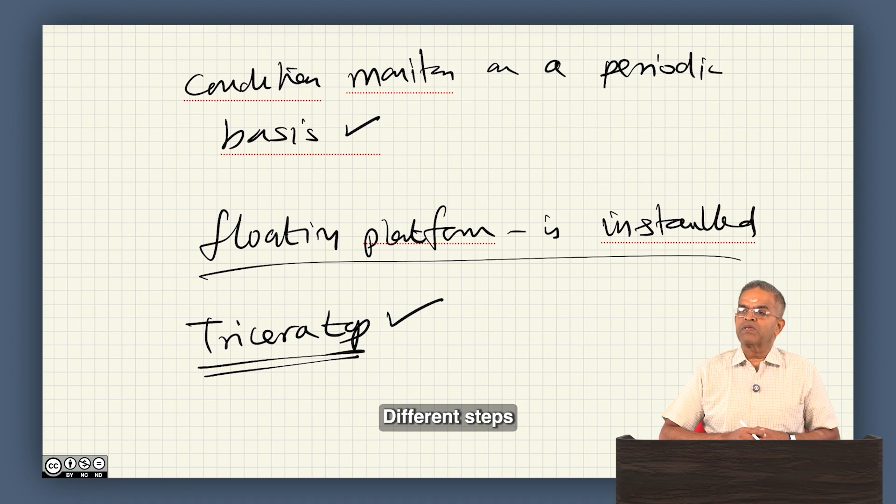So, we are talking about a triceratop. To understand how a triceratop behaves in numerical and experimental simulation, I will show you a video. Furthermore, I will show another video where the floating platform installation is explained in different steps, similar to what we saw in the jacket structures.

Hope friends you enjoyed this lecture and understood partly how installation happens on these kinds of structures. It is the most challenging and most expensive part of offshore construction. Please read these lectures again and understand them. There are many videos available in the public domain; I request you look at videos of these to have a better understanding, and should you have any questions, please post them.